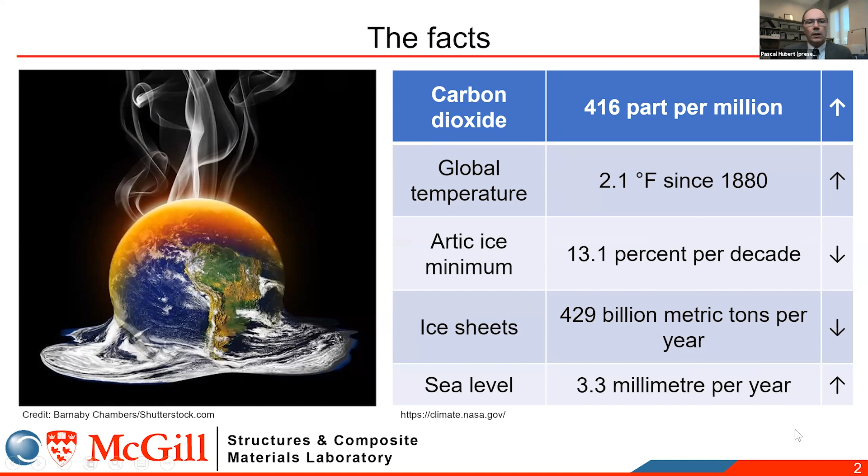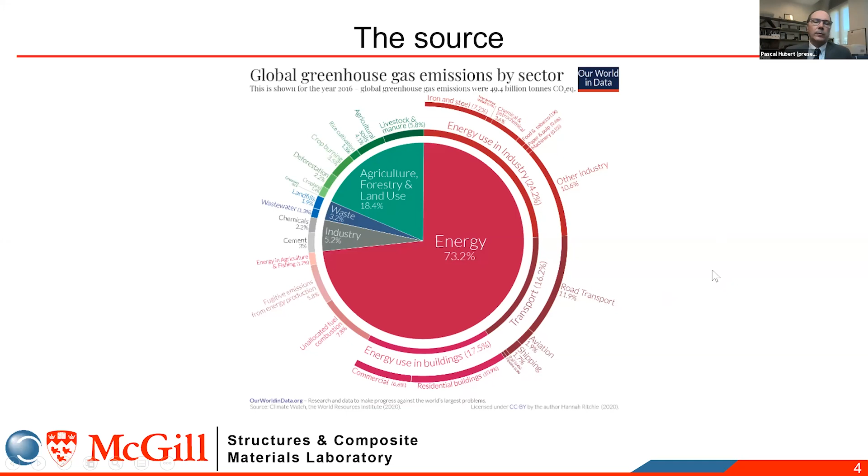The population is increasing, obviously, but our human activities, as you can see here on this chart, with our agriculture, our waste, our industry, take about a quarter of the emissions of those greenhouse gases. But the energy that we consume for our industries, our transportation, and our buildings takes about 73% of these greenhouse gases. So there's definitely something that needs to be done.

So what can we do? There are several solutions with which we can attack this problem. We can address more energy efficient transportation and things like that, so be more efficient with the consumption of energy. We need to do a better job maintaining and taking care of our waste. We have to obviously go towards renewable energies. We need to reduce methane emissions, and also we need to increase our fuel efficiency.

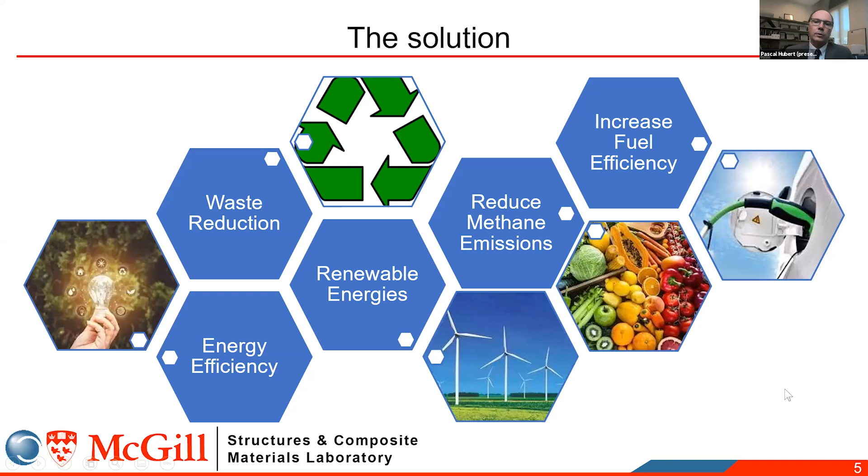And composite materials, as I will show you, can help in many of these aspects, on efficiency of our vehicles and so on. As far as methane emissions, well, perhaps we should eat less meat, and that could also help.

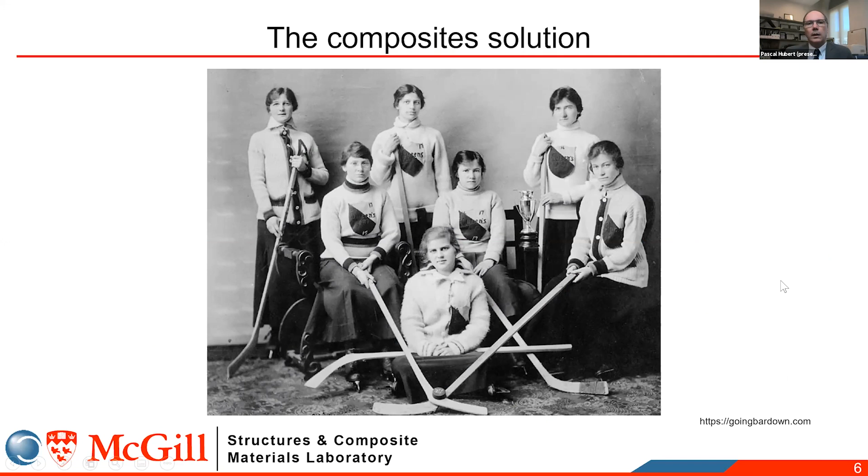So to look at the composite solution, I would like to share with you a truly Canadian application, which is the evolution of the hockey stick. Hockey in Canada is very popular, so I thought I would show you how the design of the hockey stick evolved and how composites play an important role. If you go back to the origin of the game in the 19th century, the hockey sticks were made out of wood. They were essentially a solid cross-section of wood, and they were heavy, and therefore sometimes not too performant.

And then the hockey stick evolved in the 80s to an aluminum shaft design, which was a hollow structure, much lighter. And one of our most famous players, Wayne Gretzky, really pushed for that type of stick. Then around 2000, the hockey stick was designed in composite material, mostly carbon fiber epoxy. There was truly an advantage to switching to composite because it enabled great flexibility in the design. As you can see in this picture, you could tailor the flex of the stick and therefore have a very light stick with an extremely powerful shot.

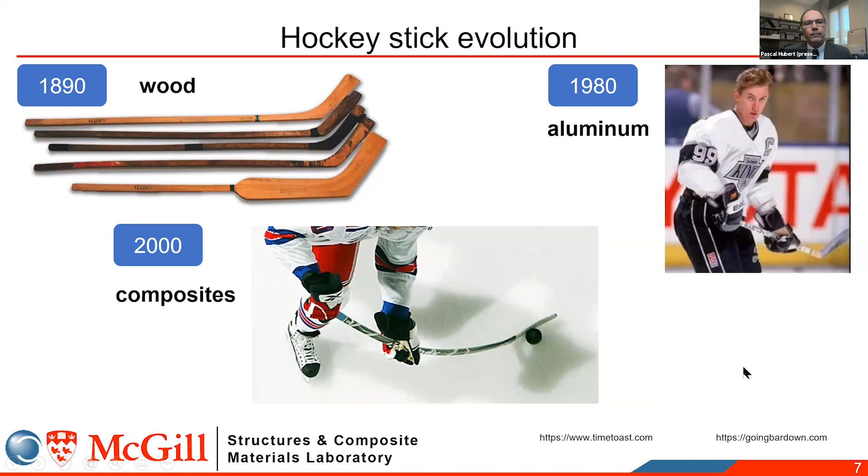So composites, as we all know, and we saw a lot of examples throughout these webinars, have great capabilities. We can design aircraft that are much more fuel efficient. We can integrate them into the design of cars that use electrical energy. We can use them to make windmills that produce renewable energy. We can also use them in applications you wouldn't think of, like musical instruments. We can make super powerful sailboats, and we can integrate them into our architectural design. So they are truly an enabler of achieving all these goals of making structures more efficient.

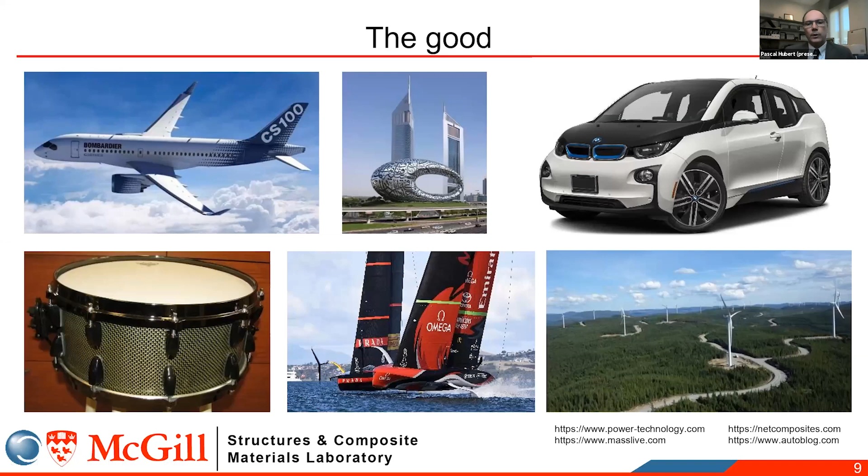But they also have their issues, and we've heard a lot about it in the other talks in this series: they can be difficult to process because we are actually engineering the material as we engineer the part, and therefore they are often hard to make, and they need a lot of trial and error. Now we have more tools to reduce the problems during manufacturing, but it's still not easy. They also sometimes have complicated failure modes, and therefore it's a lot more difficult to design structures that are very efficient and safe at the same time.

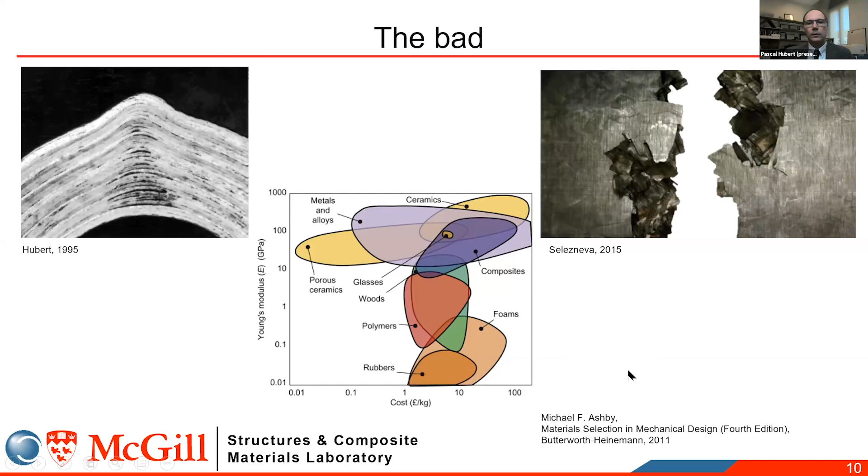So they are a bit more challenging than designing with metals. And also they are more costly compared to other materials, which therefore often puts a brake on their application compared to more conventional materials. But the true dark side of composite materials is their sustainability.

We see that making composite parts uses a lot of consumables that often are landfilled; they are not recycled. The end-of-life management of composites is really not mature. We still landfill a lot of structures. We don't know what to do. They do not degrade. We have no means of using them and reusing them. So this is a real problem, and there's a lot more work that has been done in the last 20 years on this topic, and we need to continue this work.

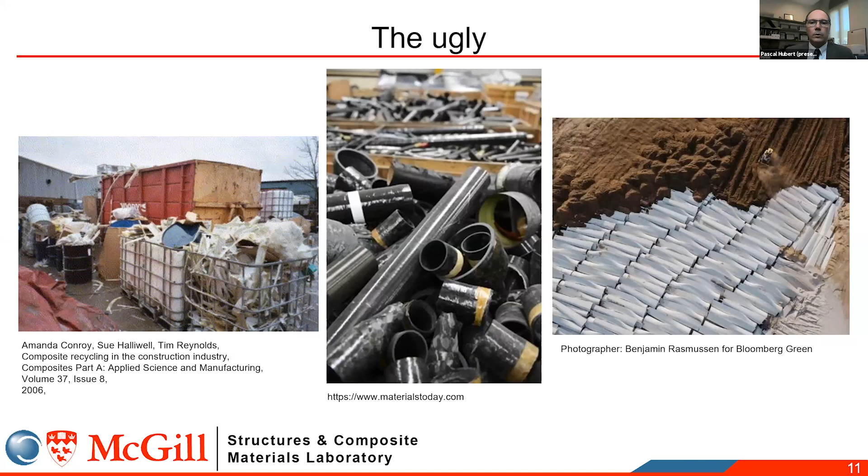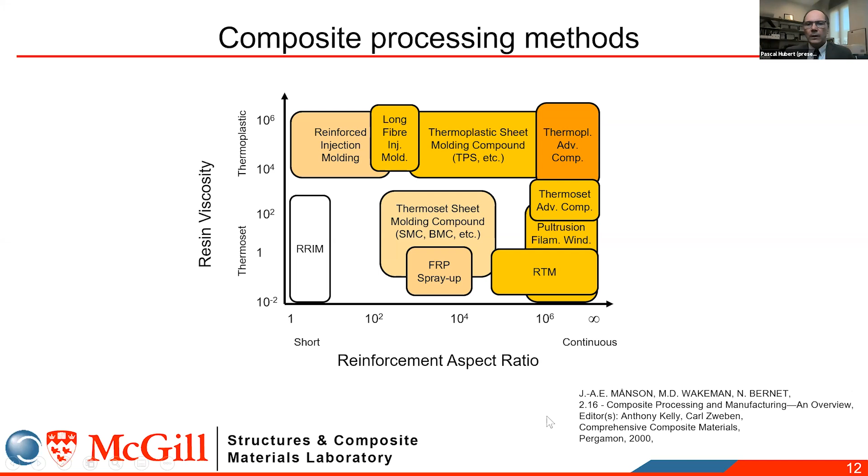Also, if you look at the way that we make composite parts, a lot of the processes use material placement that is, in fact, coming straight from the fashion industry, where you take materials from rolls, you cut patterns, and then you assemble them to make your part. That consumes a lot of material, and there's waste that we still don't know what to do with.

Now, we have a lot of development in automation of the process where you place the fibers where you want. This is great. Those processes are really taking a lot of attention. There are a lot of developments, but they're also very costly and they might not be as robust. And therefore, a lot of companies cannot use them today for their application.

When we look at the way that we cure our material, when we have thermosets, we often use ovens or autoclaves. They're not the most efficient systems in terms of energy consumption. We also use presses and other techniques, but again, the management of the energy used to cure the composite can also lead to a huge amount of energy being consumed.

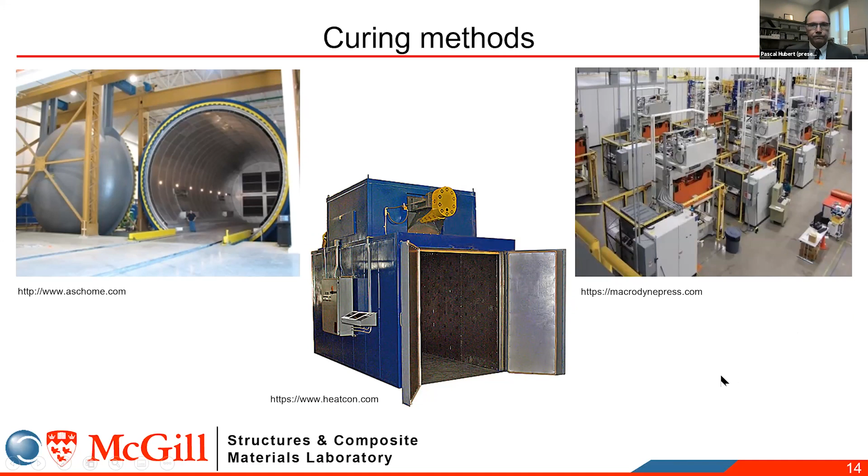So I would like to show you here a little benchmark against another type of composite, the oriented strand board, which is a composite made out of wood. And I was fortunate to spend 3 years in that industry, which I didn't know of, straight after my PhD. And I discovered a fascinating industry. And I want to share with you a little bit how they do it, and use that as maybe a target of where our advanced composite industry should try to go.

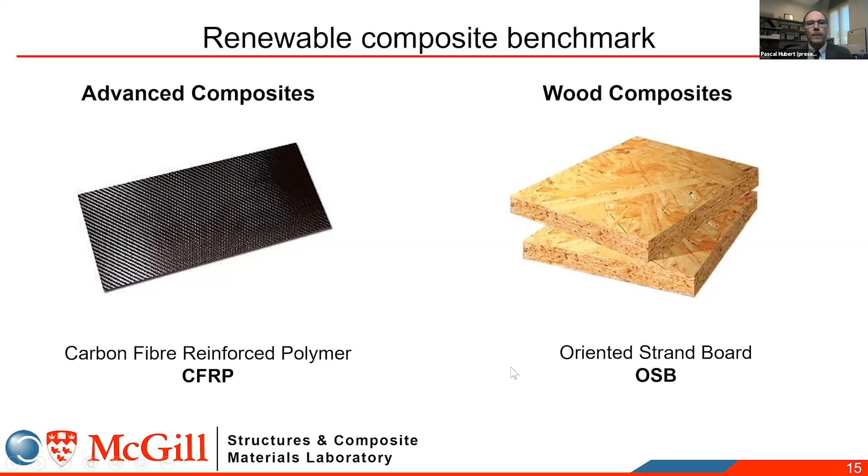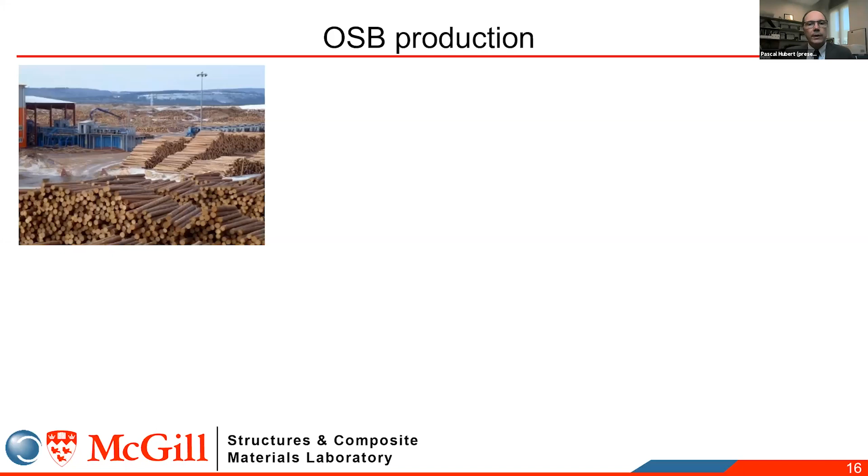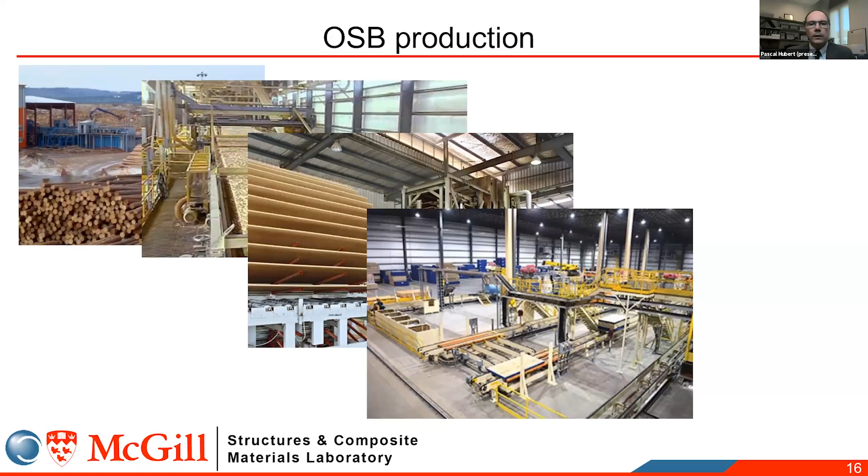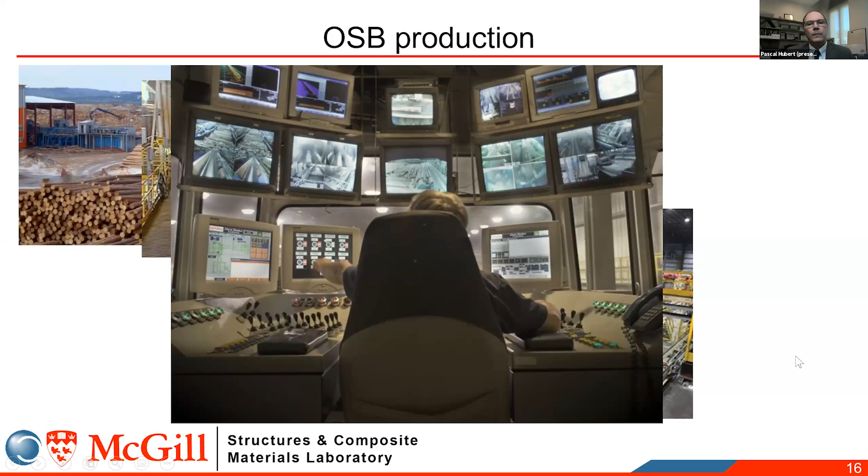And what you notice in these pictures is that you don't see any human being in the plant. In fact, there's one person in a control room monitoring all of this manufacturing automatically. So this is very far from what we do in our industry. We have some applications where the process is automated, but very few. So we have a lot of challenges for our industry to become more sustainable.

And I'm going to not cover, I could spend a lot more time on that topic, but I just picked maybe 2 examples of what kind of technology really helped us better understand the process in order to reduce the risk of manufacturing with composite materials.

So the processing science is really trying to make sure that you end up with a composite that is fully impregnated, because at the end of the day, you want all the resin to fully impregnate the fibers. You want to be able to make complex shapes, and you want also to be able to make these really nice integrated structures like sandwich panels without any problems.

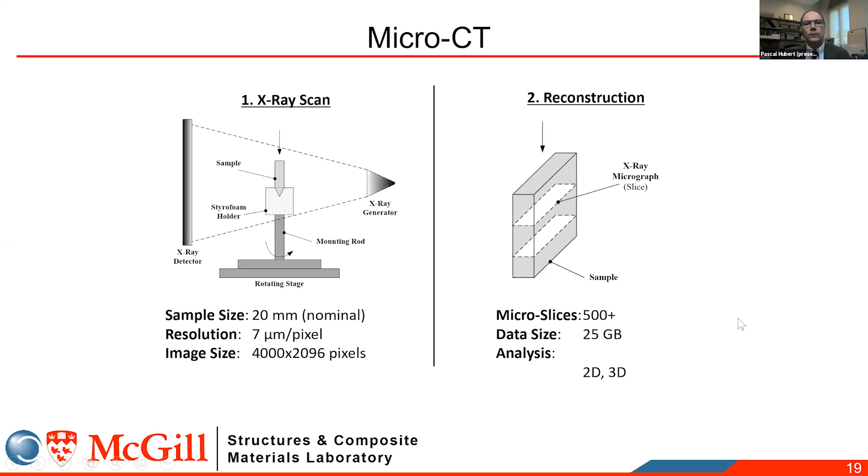And this is really incredible because micro-CT or X-ray scans have been used for ages in the medical field to be able to look inside the human body. But using that technology and being able to look inside a composite material was, for me, one of the main developments. The ability to monitor what the material was doing during manufacturing was really helpful. And I want to demonstrate that to you.

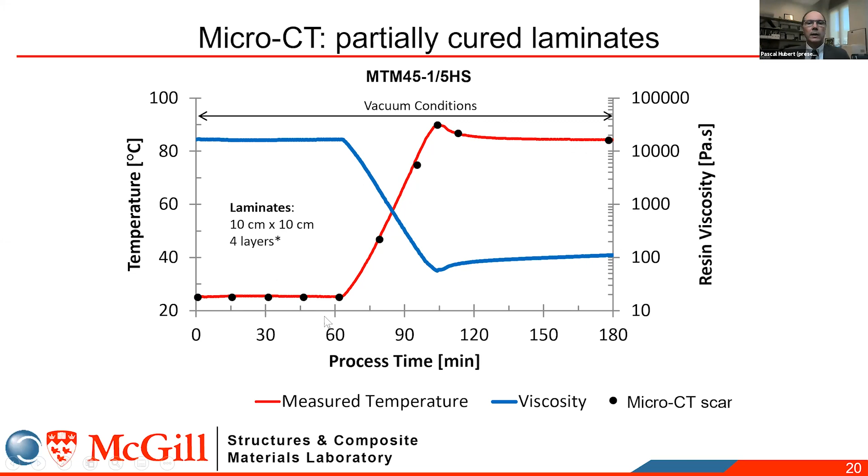So I'm going to show you some CT scans of a composite prepreg, an out-of-autoclave prepreg. And I'm going to take it through a typical cure. Here we see the temperature in red, rising to the cure temperature. And in blue, you see the viscosity of the resin decreasing to the minimum viscosity that will allow the resin to flow. And we're going to look at micro-CT images at different stages, as illustrated by this dot, where we stop the process and look at the material.

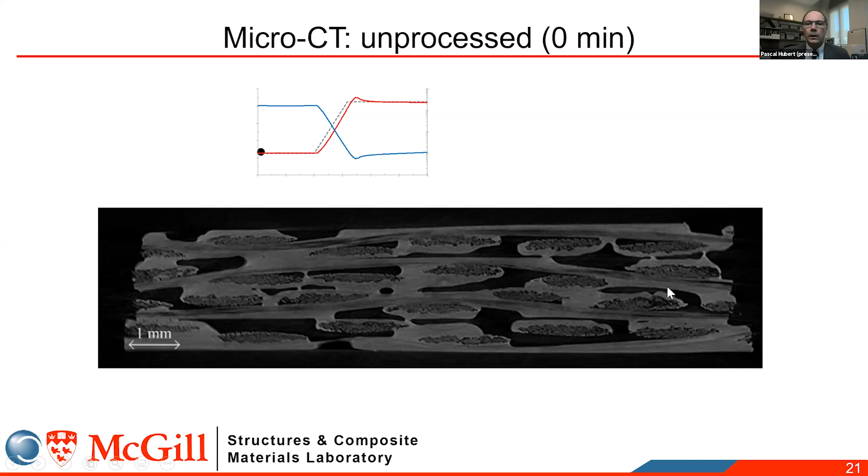So if we look at the material in its initial state, you see a very porous material. It has been engineered for that so that we can evacuate all the air. And we see the fiber tows that are not impregnated and the resin film in light gray that is surrounding the material. So now we see after we apply vacuum for some time that we get rid of some of those macrovoids through the consolidation by the vacuum pressure. But obviously, there's still a lot of unimpregnated tows.

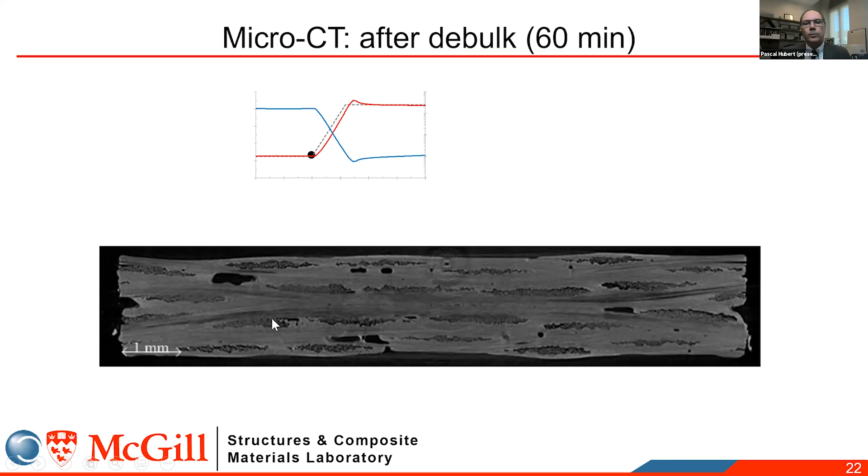As we increase the temperature and therefore decrease viscosity, now the resin can start to flow inside the tow. And we see that there are still some dry tows, but the area is shrinking a little bit. And at the end, when we get the full impregnation, we can see that the resin has infiltrated the tows.

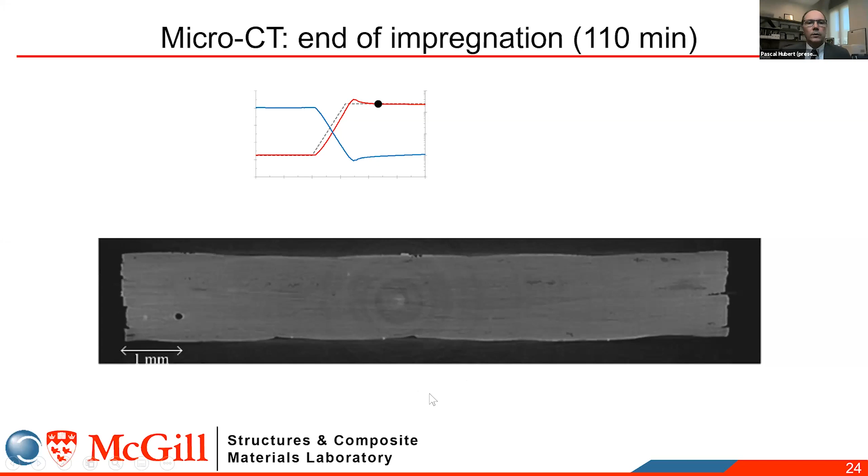And now you can take these images and do some quantitative analysis of the dry tow area evolution with time. And that's what I'm showing here. So obviously there's some variability, but you can see the clear trend that those dry tows initially are quite large, but then as resin flows, it starts to come to zero.

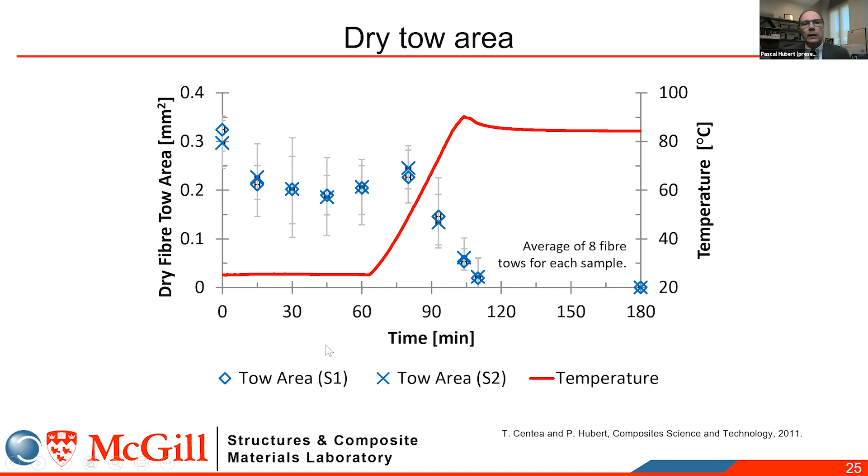Now, through these great images, we can come up with a very simple model of the tow impregnation process by just assuming the tow to be a circular bundle where we surround it with resin and we just solve for the radial flow of the resin through the porous media.

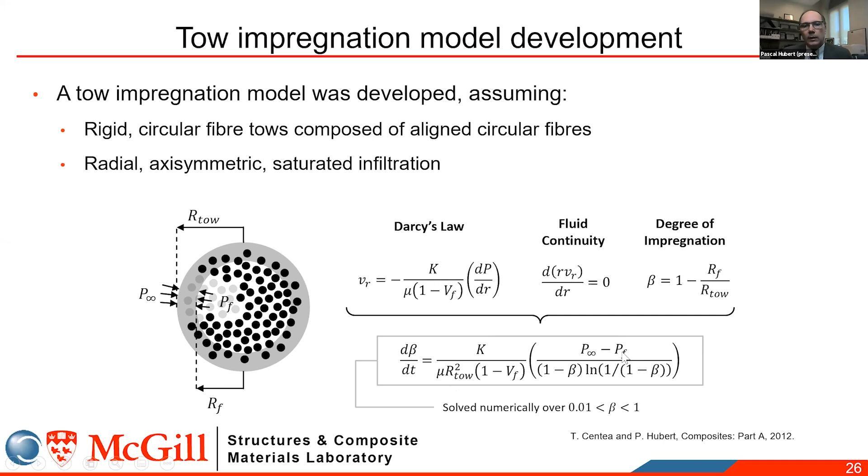We have some wonderful work that has been done over the years on that topic, and we can integrate those analytical equations and obtain a solution for the level of impregnation of the tow as a function of our material properties, the permeability, viscosity of resin, and so on, and our boundary conditions in terms of compaction pressure and bag pressure.

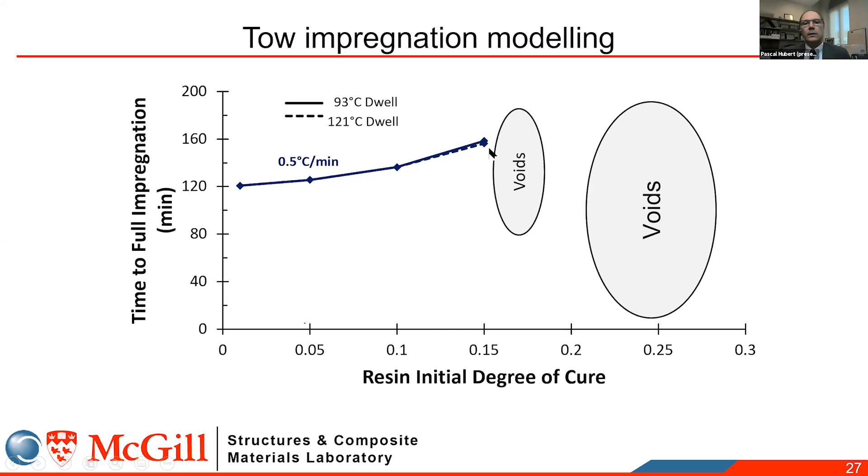Now, with this type of model, we can then run very simple simulations to look at, let's say, what is the effect of the initial resin degree of cure on the impregnation process of that tow. And you see here that if you have initial degrees of cure that are too high, which means that the prepreg would be staying out on the floor for a longer time, necessary to do the layup, you might get some voids.

And then you can see that by changing the heating rate during the cure, you can make the impregnation more efficient. And also you can have a little bit more robust system where you can tolerate a little bit more of out-time problems. So these kinds of insights through micro-CT led to a better understanding of the process, and therefore that could be used back in production to guide what kind of manufacturing protocols could lead to problems.

Another very interesting and challenging material to process are those multi-scale composites. As Dr. Pipes mentioned, I did work a few years in the field of carbon nanotube composites and also with graphene to produce nanocomposites. And the idea here is to take those nanocomposites and combine them with scale fibers to obtain some multifunctional composites.

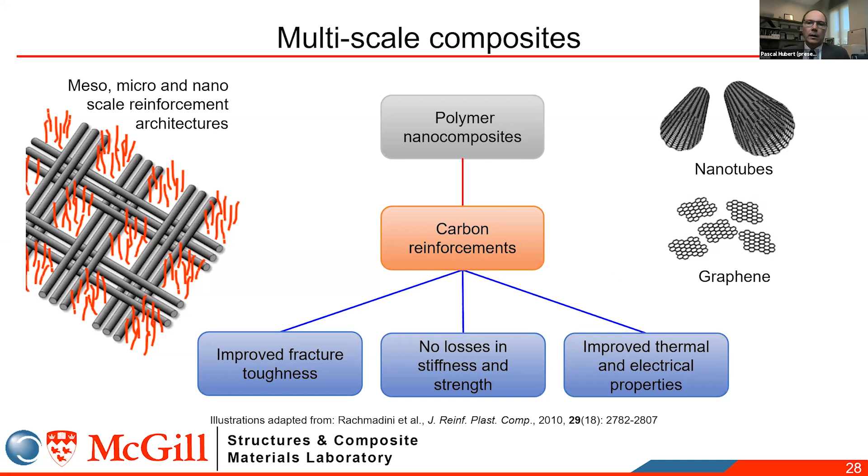But as you probably all know, in the literature, you find that it's very difficult sometimes to do this. You have issues with the dispersion of the carbon nanotube or the graphene. And the problem is that we can obtain a good dispersion to start with, but then during the process, we don't really know what's going on. And again, I found that the ability to visualize what is going on during the process gives you some good insight of what matters. And so the idea of just placing the nanocomposite on a hot stage and watching the evolution of dispersion during cure helps you to understand a bit what's happening.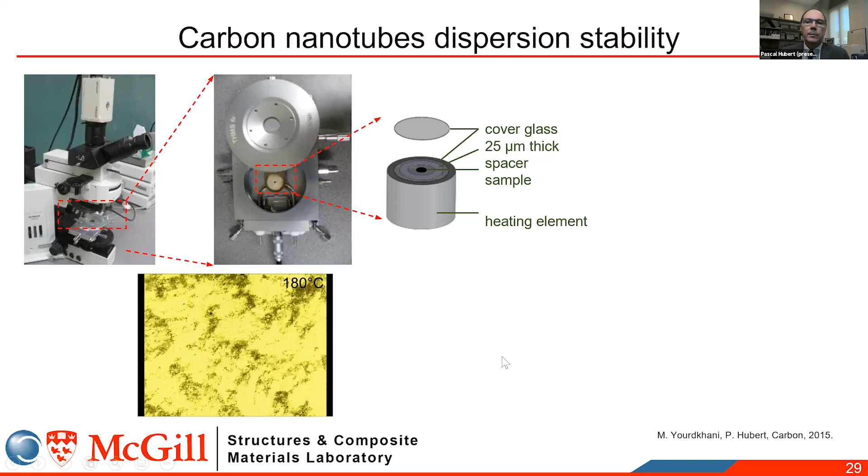And I'm showing here the little video where you're going to see the carbon nanotube. As we increase temperature, they go from a nicely dispersed state to a not so good dispersed state, where you get agglomerates of the carbon nanotubes. And with these images, you can then do some image analysis. You can then look at the distances between the matrix and particle elements and come up with a very simple index that will give you the quality of the dispersion from a uniform dispersion to an aggregated dispersion.

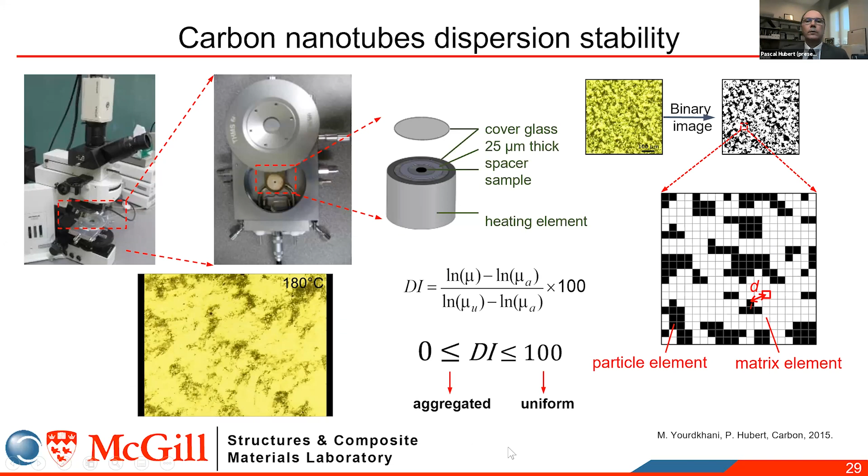And so once you have that tool now, you can start really to look at what are the effects controlling that dispersion. And to just give you an example here, I have a profile of the resin with and without the hardener. So we raise the temperature. Without the hardener, obviously, the viscosity keeps decreasing. But with the hardener, you see eventually that it cures. Now we can compare those two materials and look at their dispersion index.

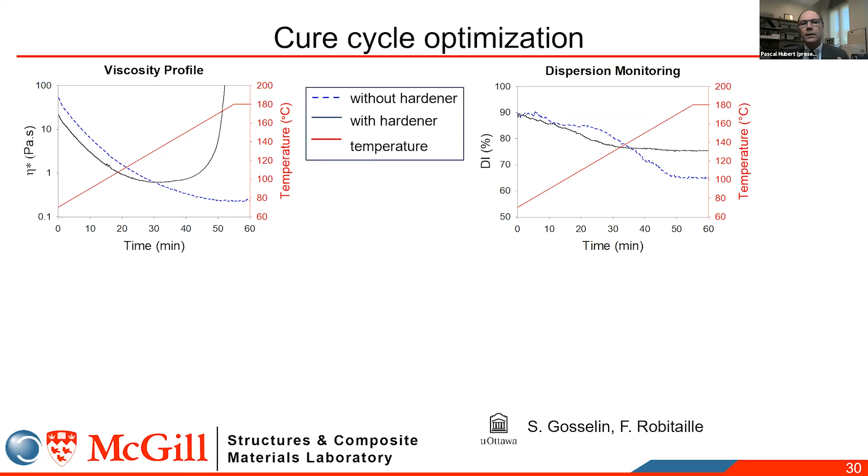And you can see that because we are capturing the video, we can calculate the evolution of degree of dispersion with time. And we can see that it starts off with a pretty good number, 90, but it finishes to a lower number. And once we have that tool, then we can do all kinds of analysis with different heating rate, different nanotube ratios, and so on. And we can start with maybe a process that leads to a lot of aggregated nanotubes, as you can see here on this image. And through some optimization, we can then obtain a much more stable dispersion of the nanophase.

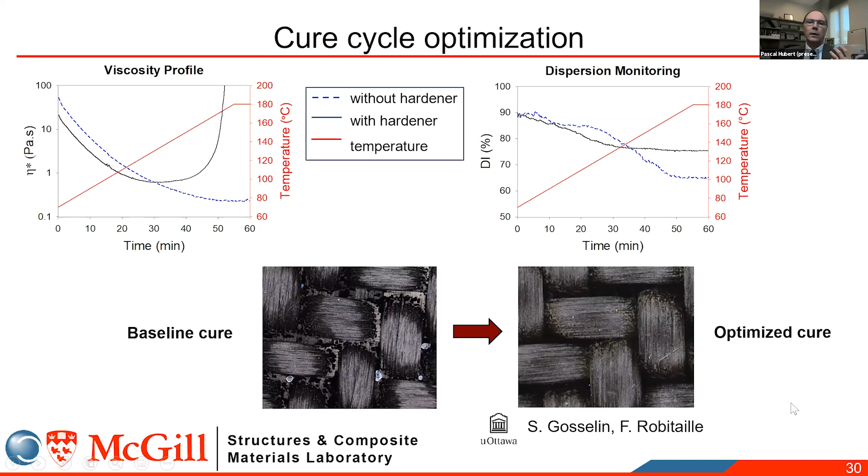So these two examples just illustrate how, with the tools that we have today, the micro-CT, being able to visualize the process using specialized fixtures to monitor all the key process parameters during cure can give us better insight, a better understanding of the processing science, and therefore reducing the risk in our manufacturing.

Now I want to jump to another idea, and it is the ability to repair. So if we can repair composite structures that are damaged, then we don't have to throw them away. And it's so important to also address the repair of structures, because in service, they will have issues. And in cars, imagine that you're running your car and then you have an accident, you want to be able to repair it. The problem with composite repair, it's not a very mature technology. If you look at a typical repair, you'll see a lot of bolts and rivets. Ideally, you want to be able to do bonded repair, but there's a lot of issues with bonded repair due to the scatter. The scatter in performance comes really in part with the uncontrolled processing variability.

You do the repair in an environment sometimes that you don't control. Remember, you need to repair now a structure that is not going to be necessarily in a nice controlled environment. It could be on a tarmac, it can be in a city that is at 4,000 meters and so on, or you can be in a very humid environment. So we need to develop better, robust repair methods.

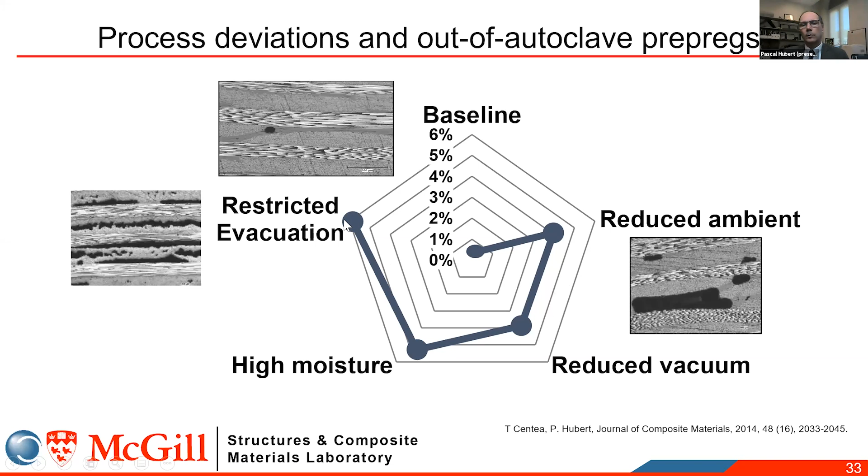We know that if we use, let's say, out-of-autoclave prepreg to do a repair, if we make the out-of-autoclave prepreg in the best condition possible, you get very low porosity. So we can control the process, you get good quality parts. As soon as you deviate from those conditions, let's say now you have a not so good vacuum in your vacuum bag, you are in the moist environment, you cannot extract all the air properly. You start to see a degradation of the quality of the composite.

So in a repair, this is what you're doing. You have a parent laminate that has a damage. You take the damage out, so you scarf, and then you put a patch. The patch can be pre-cured, or you can co-cure the patch on the part. And then we put an adhesive layer. So the challenge here is to really try to remove all the air from that patch so that you have no porosity at the bond line.

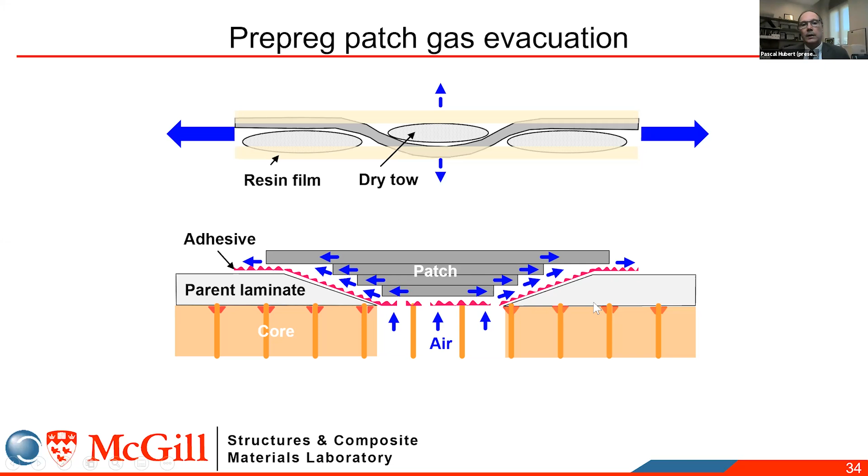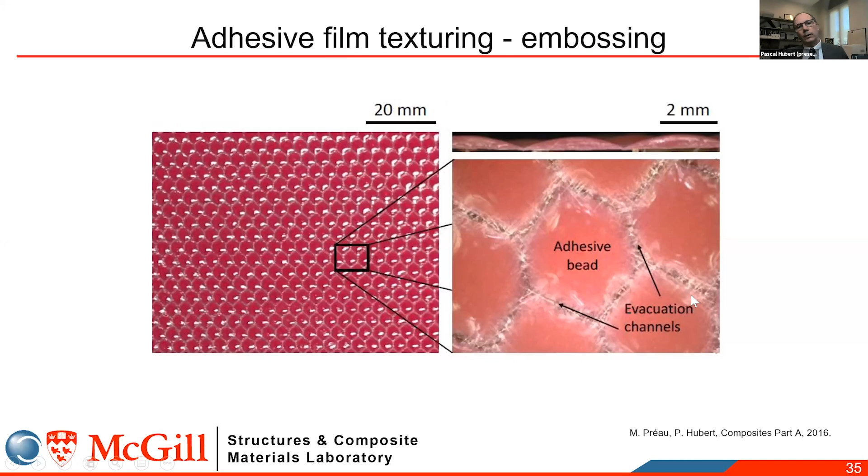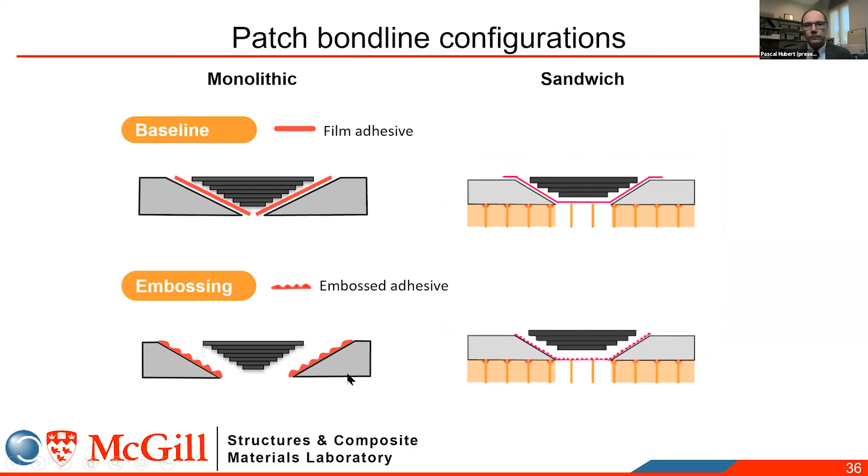One way of doing this is to do something to the adhesive. And the solution that we developed was to do an embossing of the adhesive. And by embossing, you create these little evacuation channels that will allow air to escape. To show you how it works, we can compare a repair done with a film adhesive that is normal and then an embossed adhesive. And you can see here the two configurations for monolithic and sandwich.

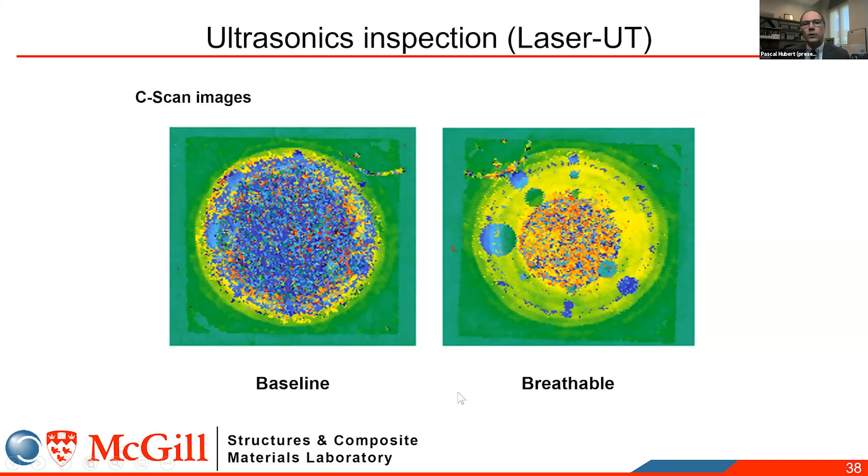And the scientific community is not really too excited about working on repair. If you look at the literature, it's very, very few papers, very little interest. A lot of it is developed by the manufacturers. But I think the scientific community could really help in that aspect, and I encourage people to work in that field.

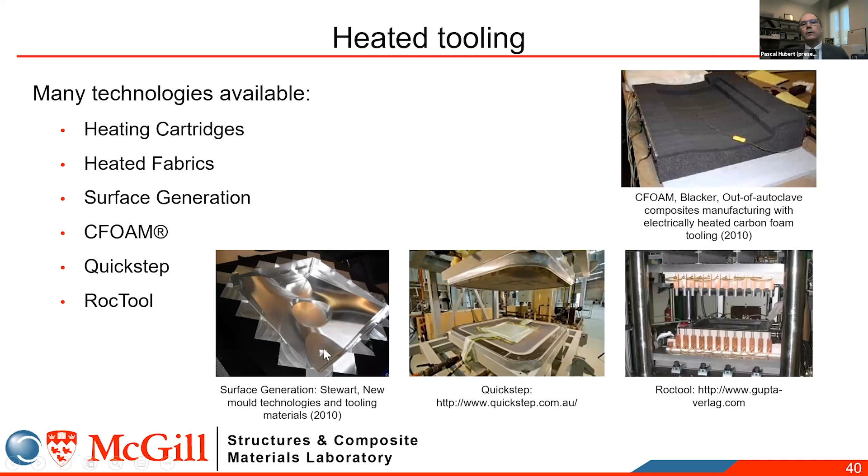Another method to make our process more sustainable is to work on reducing the energy required to cure parts. And this is through heated tooling technology. There's a lot of technology out there. If you go to JEC, SAMPE, or CAMX, you'll see a lot of companies that propose solutions where they heat the tool and cure the part using heated tooling, rather than using, let's say, an oven or an autoclave.

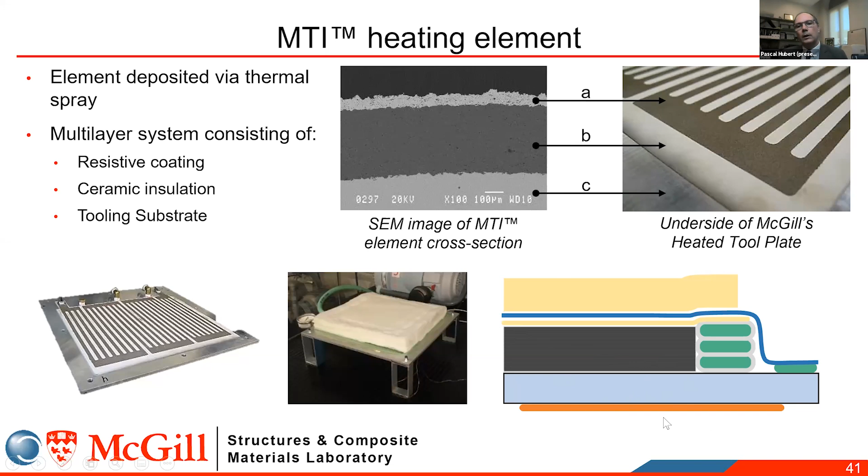What you do here is just place your laminate directly on the tool. The heating element is underside. So you're heating the tool, and you have a layer of insulation on top. It's really the concept of barbecuing your composite. In terms of heating efficiency, it's really, really good. If you compare the energy consumed to cure a part in an oven compared to those heating elements, you can have 66 to 92% energy saving. So this is great.

Obviously, there are some issues with designing the heating element, but you can also develop methods to optimize the element for the specific part that you're producing. This can also help even in traditional oven or autoclave processes where sometimes the convection cannot reach certain areas of the part. You can have heating elements placed strategically to help. So I think this is a very interesting technology that we should push, looking at alternative ways of curing our composites.

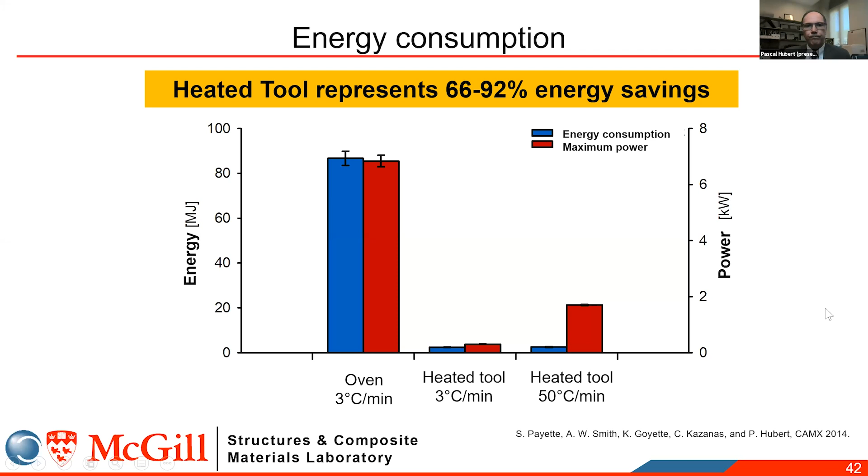The next example I would like to provide is to deal with the waste. How can we reduce waste? Well, we need to develop more net-shaped parts. And there's a lot of efforts, and I want to share a little bit of my own experience with this. So net shape can be achieved with short fibers manufacturing.

Injection molding, we can make net shape parts routinely. It's fast, you can make very complex parts, but the performance is not really great. On the other hand, continuous fibers, as you know, are excellent in performance, but it's very hard to make net shape parts. Processes are not that fast, and it's hard sometimes to make complex parts.

So the idea is to look at these long discontinuous fibers, and sometimes they are referred to as platelet composite or random strand. There's been a lot of work, and Dr. Pipes presented some of that in his presentation. So there's a lot of interest in this field, and I think we should really work on that. More people should be involved with this.

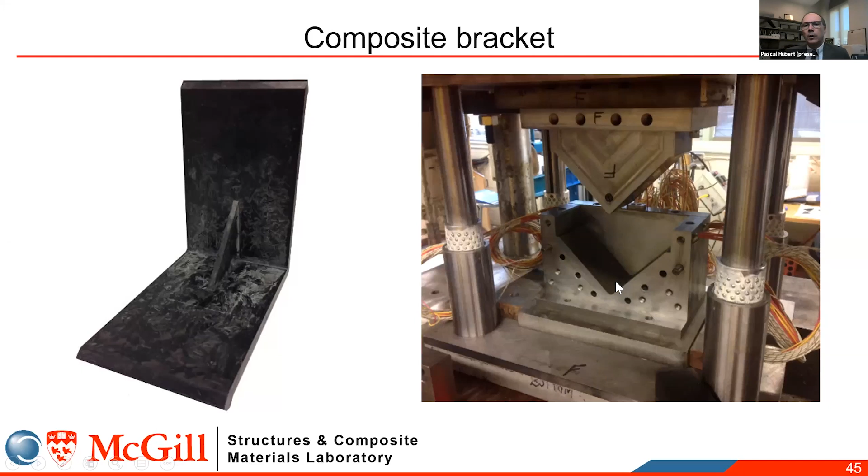And when you apply pressure, you might have problems maintaining that pressure during the process, and then you'll get some problems. You can control the heat from the top and bottom mold, but sometimes you don't know how to control it properly. So what you end up with are regions of high porosity, because at some point during the process, you lost contact with the mold and you had not enough compaction pressure. And the more complex the part is, the more difficult it's going to be to maintain this. So you need some tools to do that.

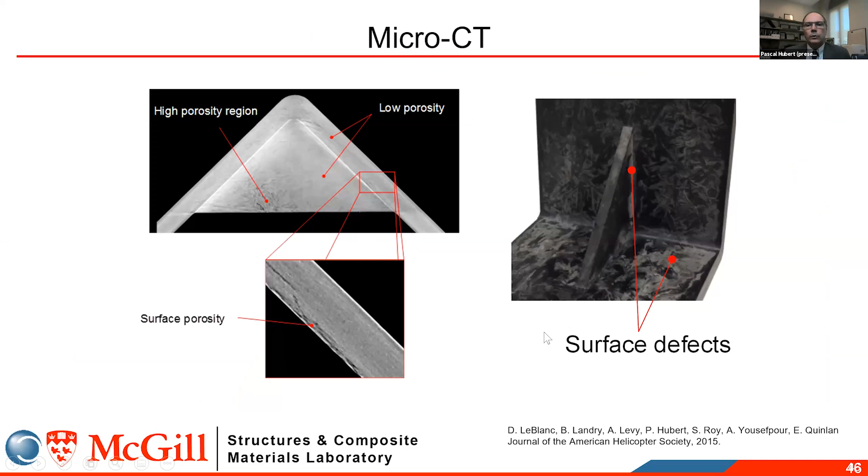So there's been a lot of work, and you've heard what was done at Purdue as well in that field. Doing simulation of those materials is key. You do the thermal simulation, so you know your temperature history, and then you can couple that with temperature-dependent properties of the material, their shrinkage, the modulus evolution, and then you can simulate how the pressure in the part changes and identify those regions of low pressure. You can also do residual stress simulation to look at parts' dimensional stability. The idea here is to use this simulation to guide you towards the design of the tooling and the process.

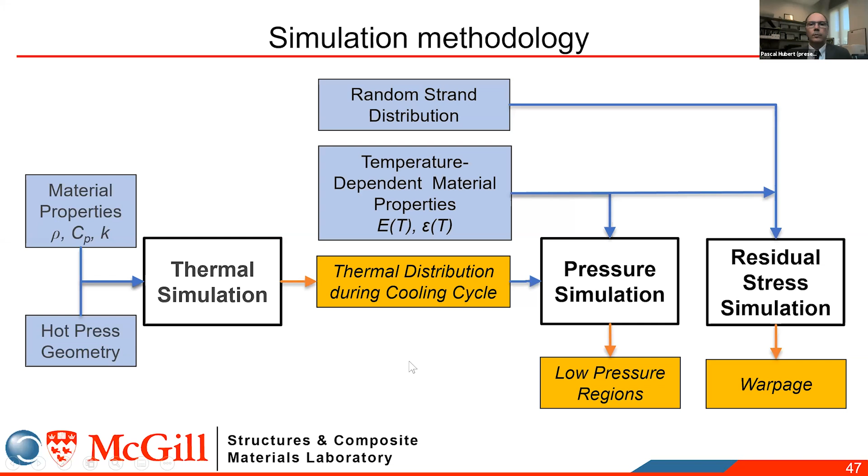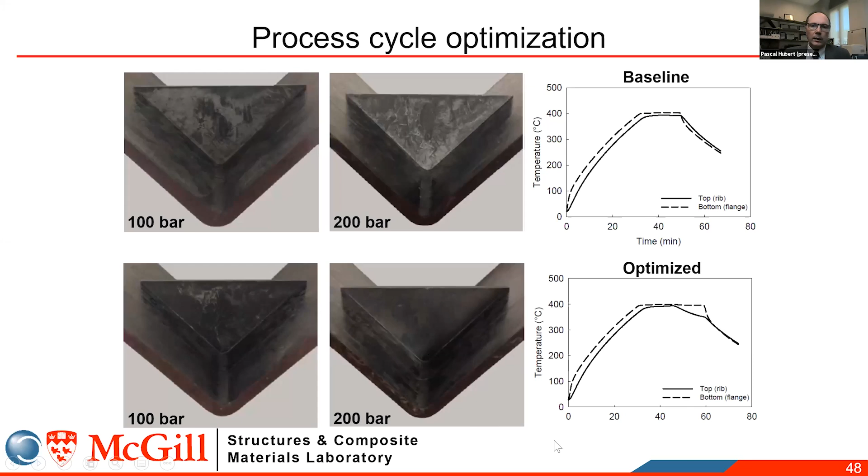Now, what you see here is that by just delaying the cooling down of the bottom part compared to the top part, you end up maintaining this pressure and creating a very nice surface for the rib. So through this development of better process control and simulation aids, you can really now make these net shape parts.

Now, one interesting thing that you can do with these net shape parts is to combine, with your short fibers or long discontinuous fibers, elements using continuous reinforcement that you can place strategically. And that in general will help increase the performance and reduce some of the variability that we see with these materials.

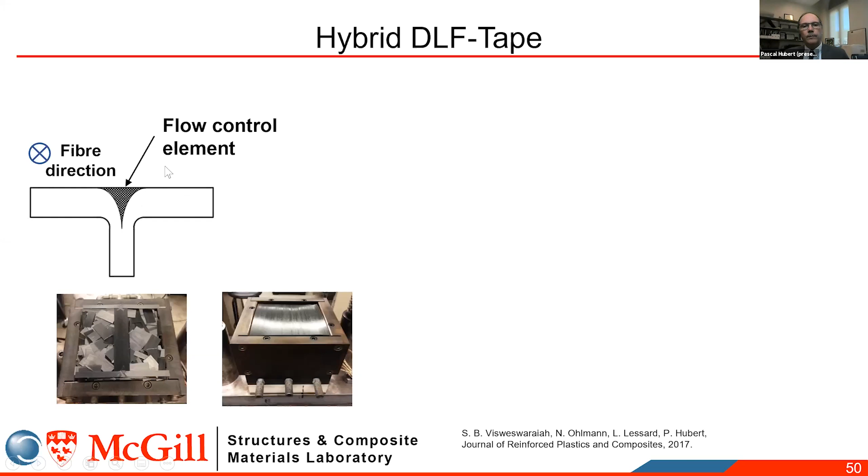Another very interesting application of these hybrids is that you can design by placing continuous fibers in strategic places in the mold. Like here in this case, I'm showing a kind of prism laminate that we place right at the base of that rib. So then when the fibers are flowing in that rib, they will be guided by this flow control element. And what you end up with is, on the right, you'll see clearly that the strands or the platelets have really followed nicely the radius in that rib. And that led to a significant increase in resistance of that part.

So again, designing these net shape parts with discontinuous and continuous fiber elements opens the door to a lot of possibilities. So that's a really good example of how we can move towards net shape manufacturing of a composite part.

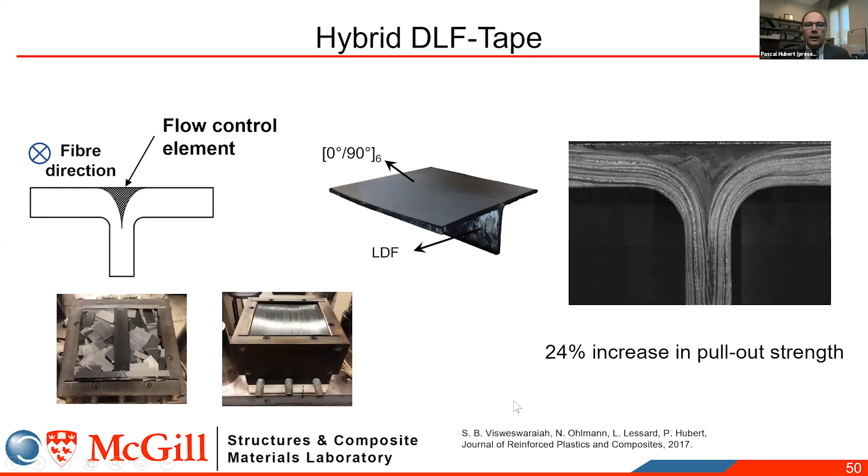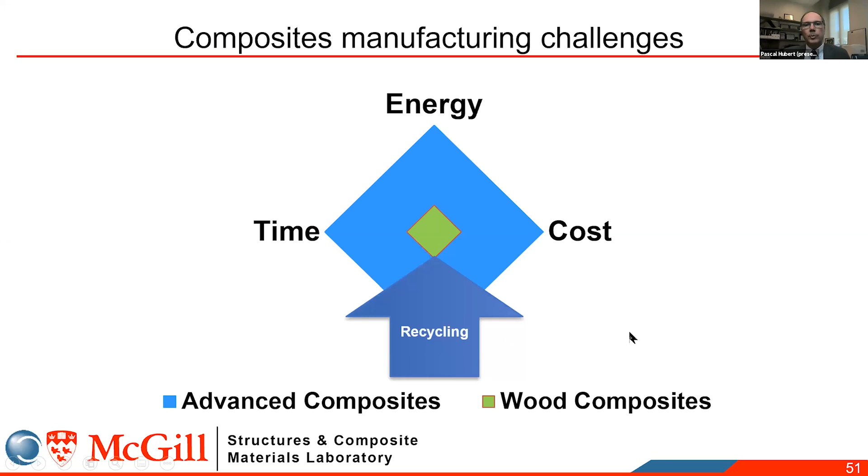Now, the last section that I want to talk about, which is one that I've been working on the last 6 years, is on the recycling business. How can we recycle composite materials? So let's look a little bit at it, and there's a lot of work, excellent work. There are companies today that can do this. So what are the approaches?

So first, you can just use thermochemical fiber recycling so that you can reclaim the fibers out of the composite. And that can be done at an end-of-life stage or with manufacturing scrap. So what you do is you basically get rid of the resin. This often creates some issues at the fibers. You degrade the fibers a little bit, and you just throw away the resin, and that in some state is uncured if you take manufacturing scrap. And you often have to have large infrastructure to do this.

Then the approach of basically just shredding the composite through a mechanical comminution will obviously degrade the fiber properties. You get some kind of filler more than a composite that can be recycled. And you cannot recover a lot of fibers through that process. And finally, the other approach is to say, well, I'm just going to burn the composite and capture the energy. Well, this is one approach, but it's not considered recycling.

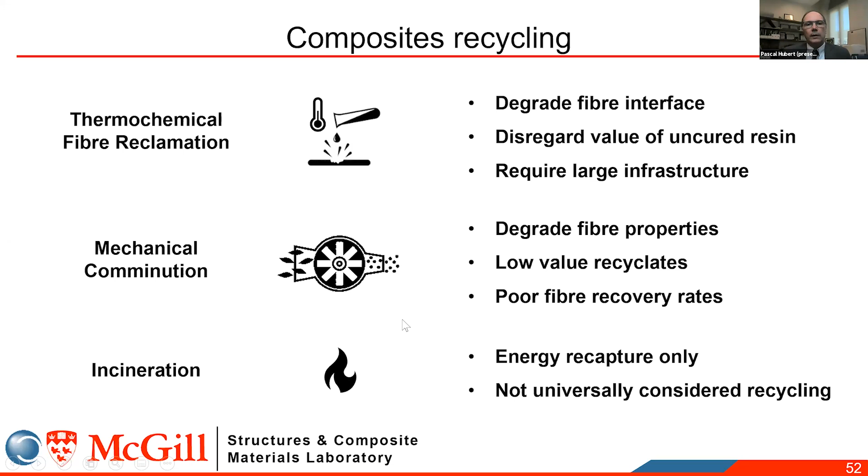So what I really concentrated my effort on was dealing with this uncured manufacturing scrap for pre-preg. As I explained in the beginning, our pre-preg comes in forms of rolls, and then we cut patterns. And so there's a lot of offcuts from the pre-preg ply cutter. There's also a lot of expired material, rejected material. These are all materials that have pristine fibers and matrix. We know their history and how they were stored and processed. There's very limited contamination. And more, it's going to be more expensive to dispose of these materials.

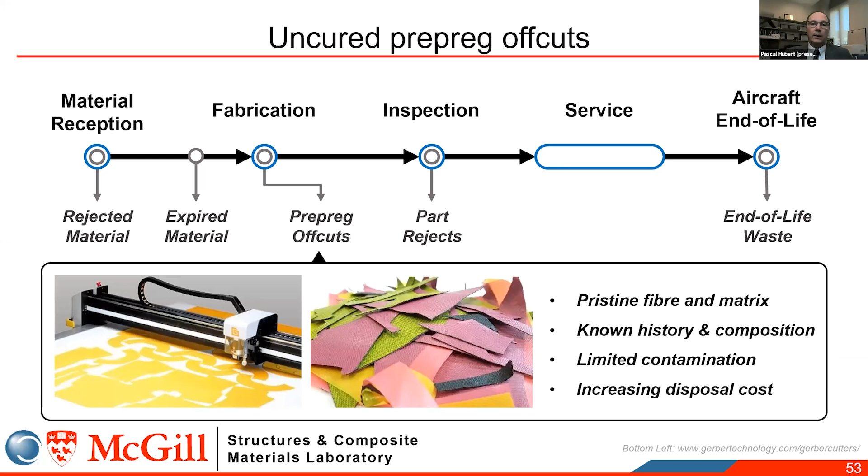So that's the kind of recycling that I was really interested to develop, because the numbers can vary from 30 to 50% waste. So it's very significant. So the approach that we developed was to take these uncured pre-preg offcuts and transform them into a recycled compression molding compound. So I'm going back to my chip idea here. To do so, you need to do some resin characterization, some flow experiments, so that you can design the right staging protocol for the pre-preg to get to this recycled compound. That's what I'm going to be showing to you briefly.

So let's say that you want to do it without doing all of what I'm going to present. You're just going to take the offcuts, you're going to cut them and try to make a part through compression molding. You're going to get an ugly part. You're going to get resin fiber bleed, very poor quality with voids. It's going to take a long time for you to cure that material. And the material is going to be very hard to handle because you're going to deal with a pre-preg that is tacky because it's straight from the roll.

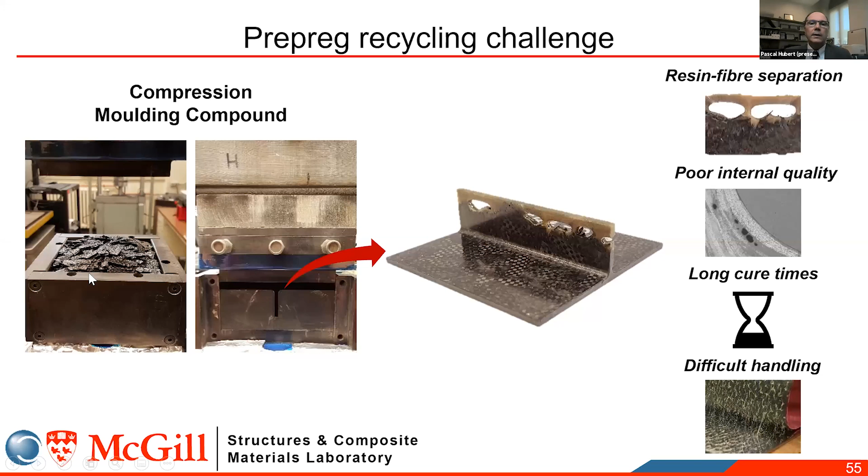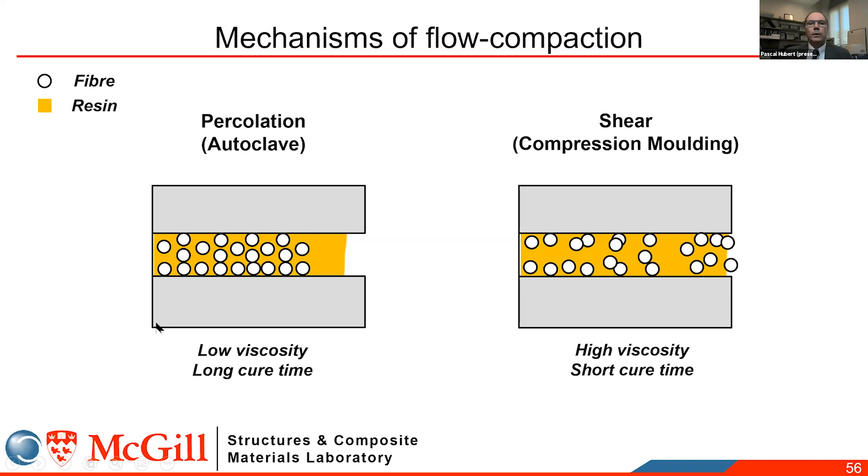Okay, so that's because the pre-pregs were designed for an autoclave process. In an autoclave process, when you apply pressure, you're going to want the resin to flow and wet the fibers. So you want low viscosity of the resins to fully impregnate the part. And then the resin will be controlled because of the pressure used in the autoclave and the type of shape that you're doing. But when you try to do compression molding, what you really want is the resin and the fibers to flow together. You want to be in a shear flow mode, which is typical of high viscosity resins. So you want to go from the autoclave to the compression molding process. So this is done through pre-preg staging.

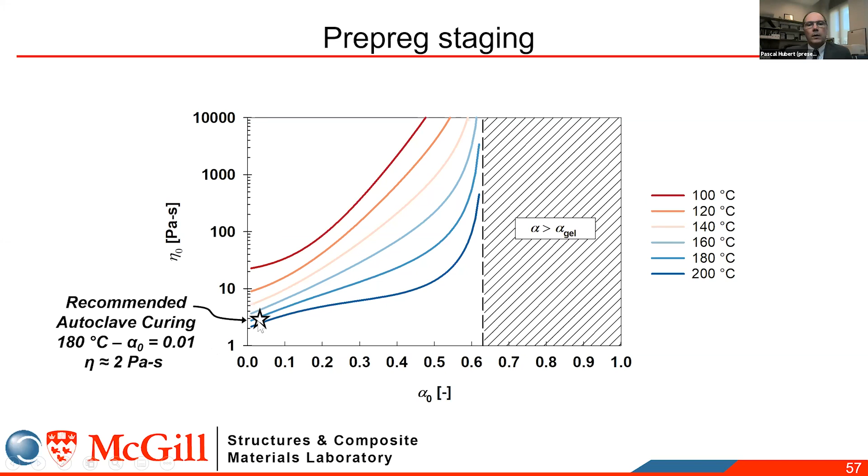So here I'm showing you a viscosity map and initial degree of cure. And the different lines represent different curing temperature protocols, low temperature to high temperature. So if you take an autoclave pre-preg, it's usually cured at 180 degrees Celsius, and it starts fresh, so very low viscosity and very low degree of cure. If you want to now increase the viscosity of the resin during cure, you will have to cure it at lower temperature. And that will take forever because the cure kinetics of that material is not optimized for low temperature cure. In order to have your shear flow behavior, you want to be in that range of viscosity. This is typical of the thermoplastic composites that are flowing by shear most predominantly.

So what we want to do here is to take our pre-preg and stage it, B or C stage it if you wish, to a range of initial viscosity that will trigger the shear flow of the material. And we'll be able to process it at lower temperature and in a much faster way.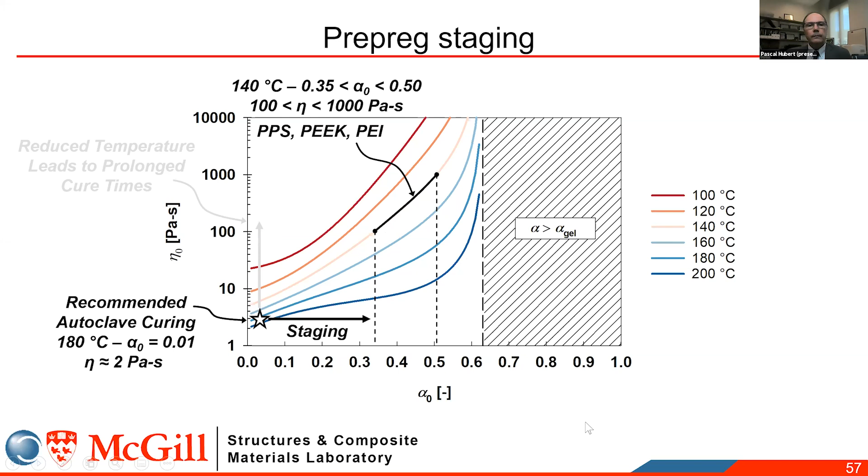So with the help of these 1D flow compaction experiments, where we place the pre-preg into a mold and excite the flow in one direction, we can really observe the occurrence of that shear flow and try to find the best staging conditions so that we can get the most shear flow. And this is the type of result that we get from these experiments.

So for different levels of staging, that's the resin viscosity axis. So with more staging, you'll have higher viscosity. You'll see the effect on the amount of shear flow that you get. So obviously in that range, the shear strains, the shear flow is very low, so it's not the best conditions. You need to be in that range here, where you can see values of shear strains that are higher. This is what we want to get.

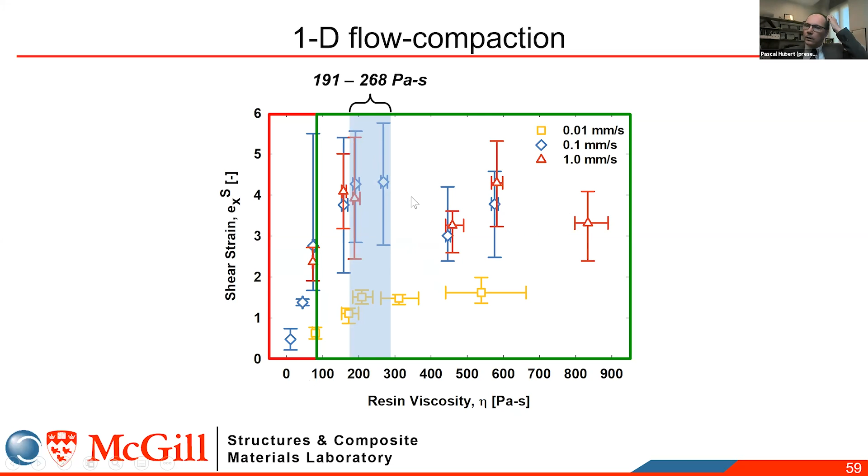To find a good balance between the amount of staging that we need and the level of shear flow that we have, we will probably want to be in the range of 200 to 300 Pascal second for that material. So this is the kind of staging target that we're going to get.

To show you how this staged pre-preg or recycled pre-preg material performs, we're going to demonstrate the manufacturing of two complex parts. One that has a multi-rib and one that has different features, very sharp radii, thickness changes, and even a hole in the middle. So this is how we place the recycled compound.

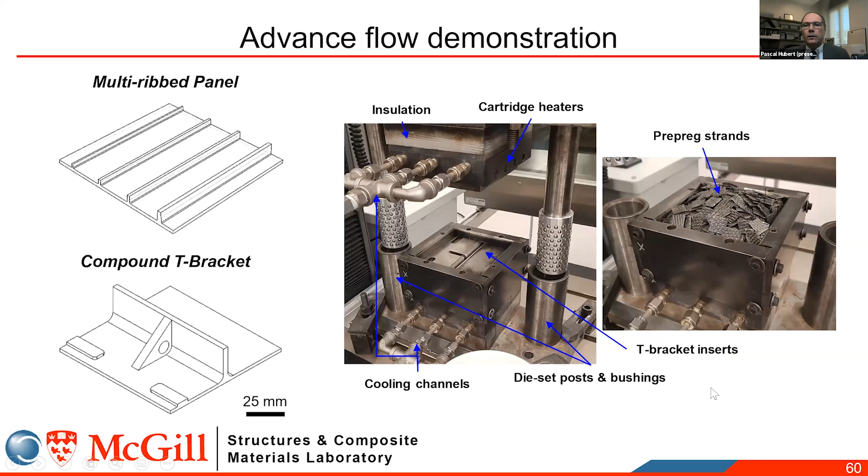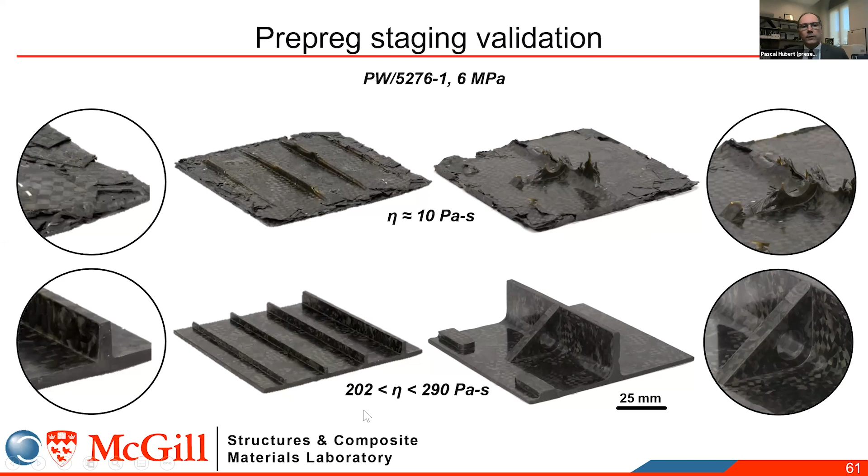And then just to show you what happens if you don't do the staging, the top images are these two parts with pre-pregs straight from the roll that were cut, no staging. And as I said before, it's not going to work because it cannot flow properly. With the right staging protocol, now we can make very nice parts with very high quality. And that's the key of being able to use these offcuts, is to bring them to the right level.

Now, obviously, there are some challenges, as you can expect. A lot of the pre-preg comes with the backing film that needs to be disposed of and taken care of. Obviously, there's some risk of having a little contamination. You can sometimes have a mixture of different pre-pregs, and can you combine them and use them as a compound? There are a lot of questions to be answered.

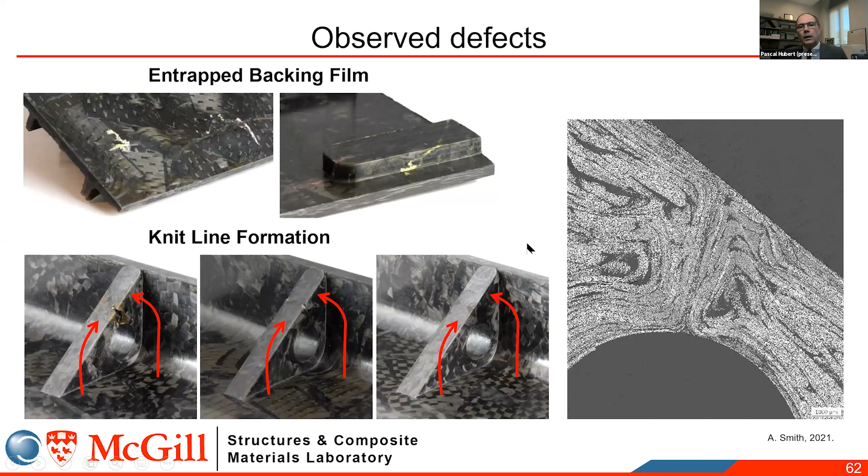When you design complex shape parts, net shape, you also have to look at the possibility of knit line formation, and you can clearly see it on this image. But this is true for any net shape part, so you have to deal with these issues. But this recycling is very promising, and there are companies out there that are actually using that approach, and truly this is a part of the solution.

Now, I would like to show you also some other initiatives that will help towards sustainability that are not necessarily my work, but other ideas that are going on. So the first one is additive manufacturing. Obviously, it's a field that is allowing you to make net shape parts, and it's really growing at a very high rate. There's a lot of interest there. So this is definitely going to be a technology that will help reduce waste.

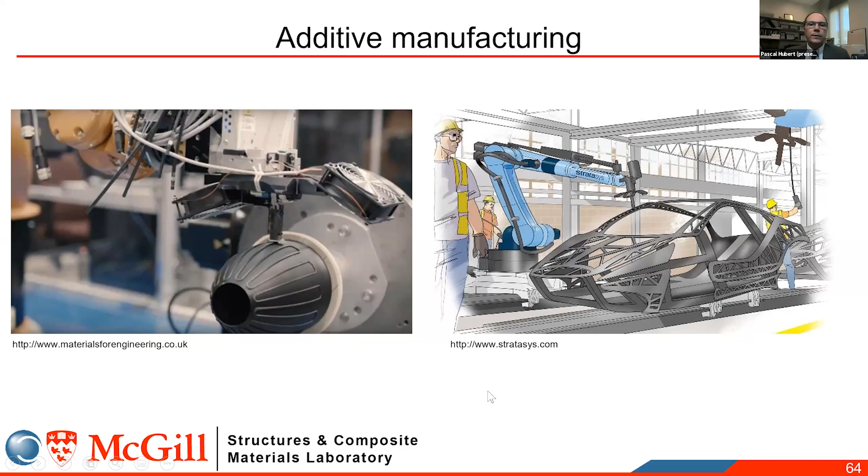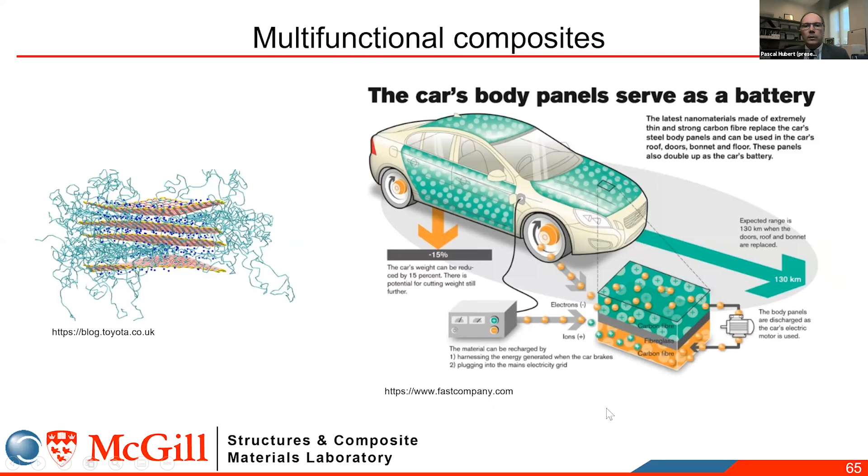The multifunctional composite, where you can combine structural and electrical capabilities of the material, will also be a very valuable application, making our cars even lighter. Self-healing materials, again, in the idea of dealing with the repairability of the composite. Self-healing materials are also a very interesting solution to the idea of increasing the sustainability of the material.

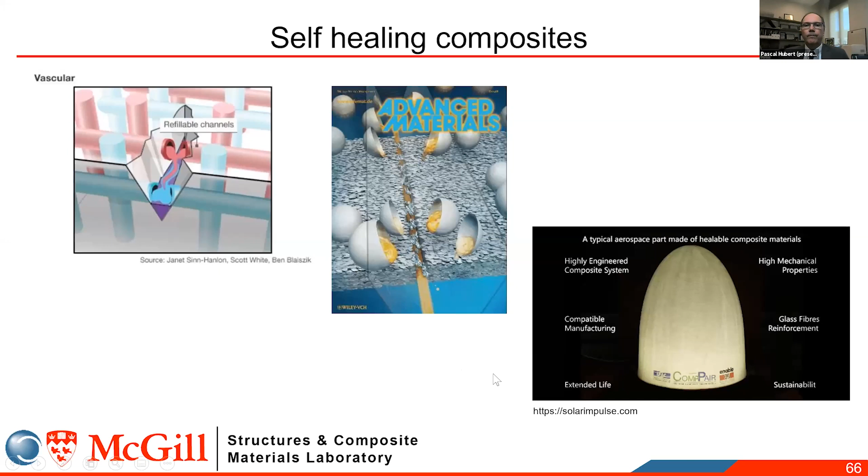The use of biocomposites, so it can be biofibers, bio-based resins, really important. Always being careful with using proper feedstock and not creating more problems by treating all these biomaterials, and you have to do the right analysis, life cycle analysis, but this is part of the solution.

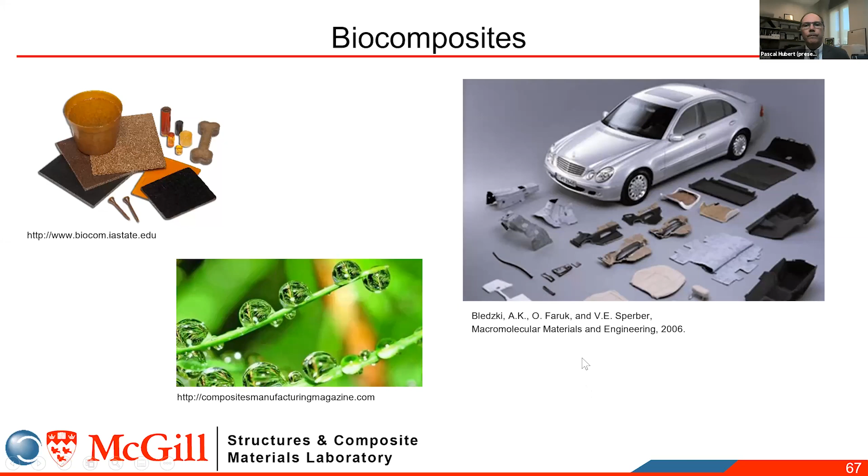And recently, just in terms of the way that we meet, the way that we teach: as you saw initially, a lot of our impact on our greenhouse gas emission is through the travel that we do. And with this last year, with this pandemic, we were forced to actually stay home and work from home. And that had an impact on the greenhouse gas emission. Can we reinvent a little bit the way that our community interacts, how we teach?